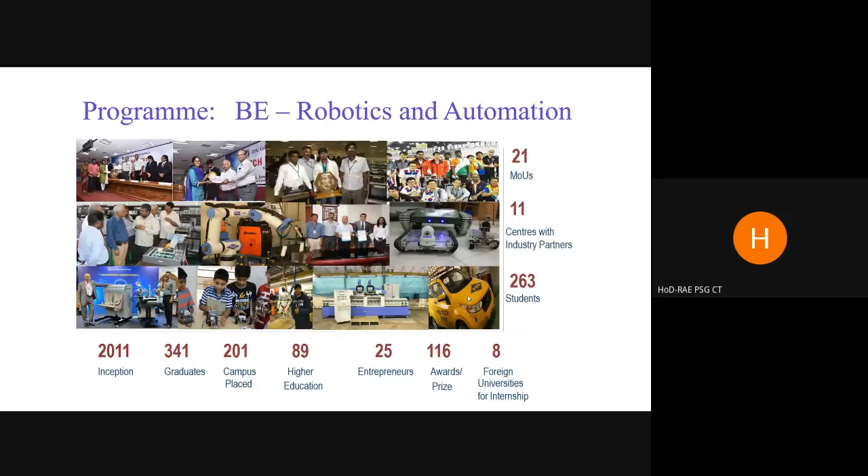There is another autonomous car which we were trying to develop for Mahindra as part of the Mahindra Rise competition. These are some of the snapshots of what we have done so far.

The faculty, unlike other conventional programs, we have a pool of faculty members from different disciplines: electrical background, electronics, computer science, mechatronics, and mechanical engineering. Their expertise is shown under the following headings.

17 faculty members are there put together. 10 are having PhDs, 5 pursuing PhDs, and 25 full-time as well as part-time PhD scholars in the department. Out of the 17, 6 of the faculty members are with industry experience.

The average years of experience of the faculty members is around 14. We have 18 plus 1, 19 sponsored projects to the tune of around 40 crore. We have around 16 project engineers altogether working under various projects. So far, about 248 publications from all these faculty members.

The faculty members actively participate in conferences, workshops, and other training programs. We have good strength in design, manufacturing, and industrial engineering. We have a group working on sensors, machine vision, and image processing, because in any robotic system vision systems play a major role. Then controllers and soft computing, there is another team. Electrical machines, drives, and control systems, there is also a good team.

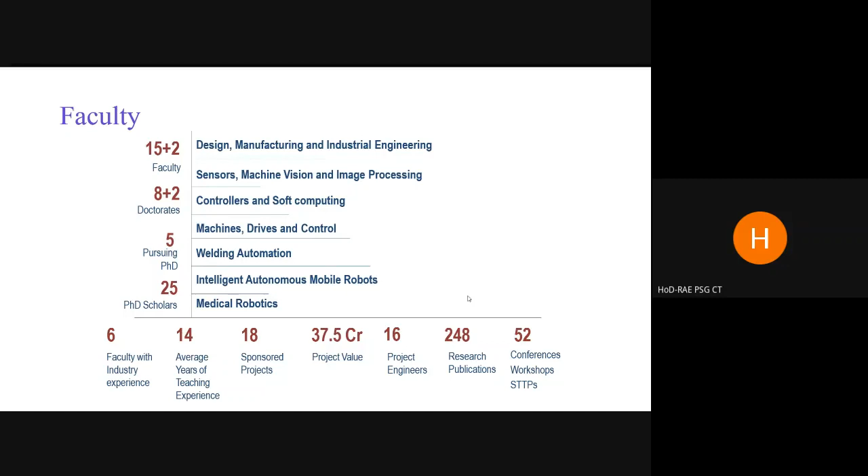Welding is one area. If you take the application side of robotics, we have identified 3 major areas. One is welding automation, welding robots, under the industrial robotics group. Another is mobile robots. Another team is on medical robots. So the application expertise spans industrial robots, mobile robots, and medical robots.

These are my strength, the department's core group, and their expertise are shown here. These things, I think you can have a look at in the website and you can get it.

Just a sample of how the curriculum consists, because most of you may be from other background, other core programs. So this is how the constitution of the curriculum is. Basic sciences forms part of it, as a standard AICTE's grouping.

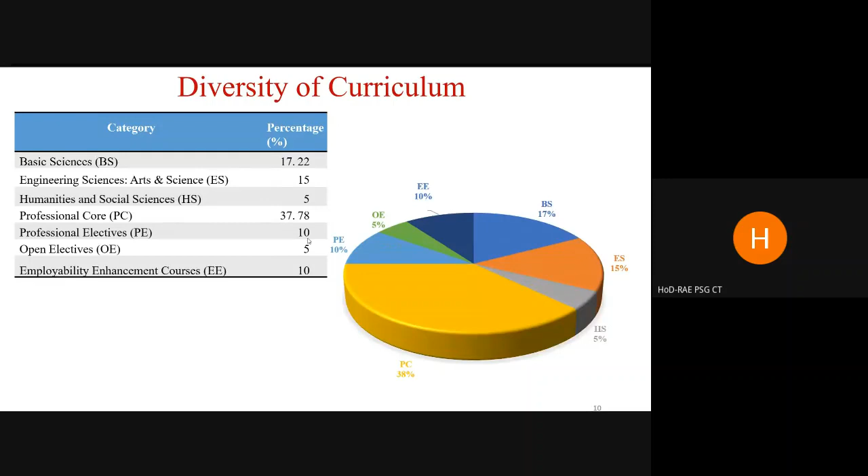Under mechanical stream, we have strength of materials, kinematics and dynamics, hydraulics and pneumatics, manufacturing technology, design of mechanical transmission systems.

In the electrical stream, we have electrical machines and power systems, linear integrated circuits, automatic control systems, microprocessors and microcontrollers, power electronics and drives. In the computer science stream, we have data structures and algorithms, embedded and real-time systems, Internet of Things, machine learning, AI.

Under automation, we have sensors and transducers, CNC machines, PLCs, automation system design, and TIA. Coming to the robotics group, we have robot kinematics and dynamics, field and service robotics, industrial robotics and material handling systems, vision systems, and medical robotics.

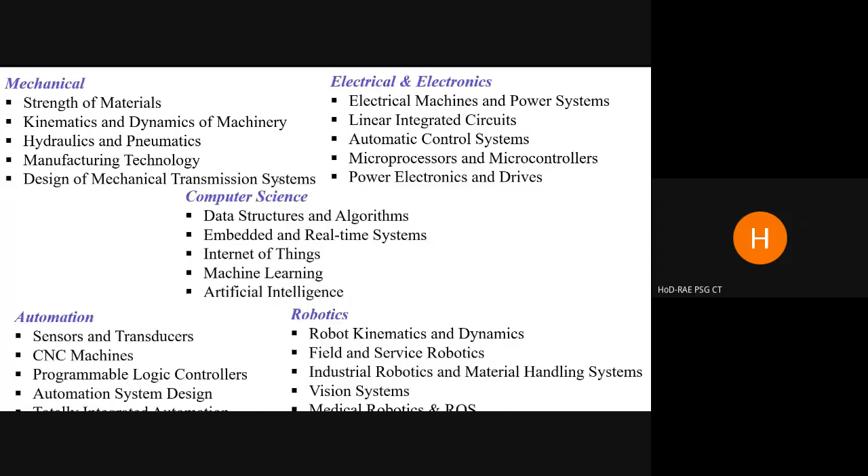So these are the major courses the students of this program go through. At the end, once he or she completes this program, they are able to take up design and development of automation systems, as well as robots for various applications.

Apart from the 3 credit courses, we also have a system called the 1 credit course. These courses are offered not from the department, but by experts of the discipline from various industries. Industrial experts come and deliver courses on these titles, and evaluation also will be done at the end.

One major thing we practice in the department is that for every course, a student going through the program should do projects or mini projects. That should satisfy, and will be a part of the assessment.

To make that possible, we have internships and an innovation lab. In the 7th semester there is project work phase 1, and a major project in the 8th semester. We prefer students to go to industries, take up an industrial problem, and work on it. Internship possibilities in foreign universities can also be explored.

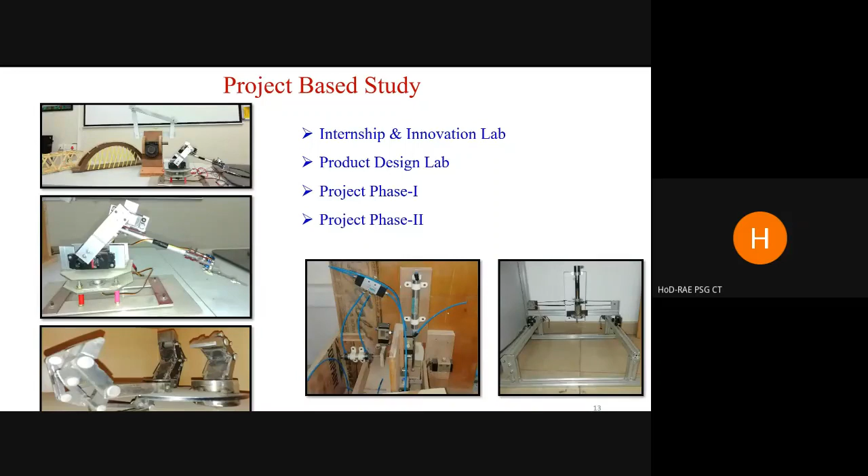To make learning more practical, we have several hardware facilities in the department. These are some of the centers of excellence which we have set up in association with various leading industries in the field of automation and robotics.

The first one is the PSG Siemens Center for Excellence in Automation. This center houses PLCs, DCS, SCADA, and HMI systems. We also have application units with servo motors, stepper motors, induction motors with VFD or variable frequency drives.

Then the PSG Adept Center for Robotics has 2 robots with Omron and Adept. One is a SCARA, another is a parallel kinematic robot.

Then we have a center with Festo, called the PSG Festo Center for Robotronics, where we have simulation stations and hardware stations where automation processes can be simulated. We also have a Robotino industrial as well as mobile robots from Festo.

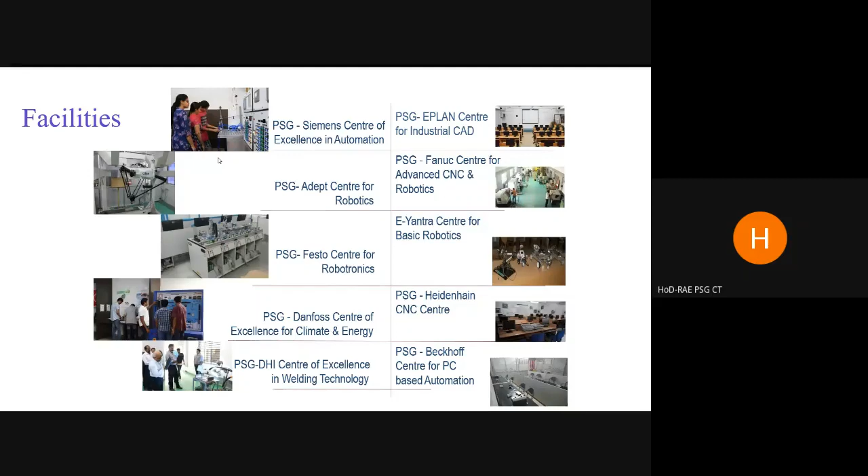These are the snapshots of the facilities available in the Center for Excellence in Welding Engineering and Technology.

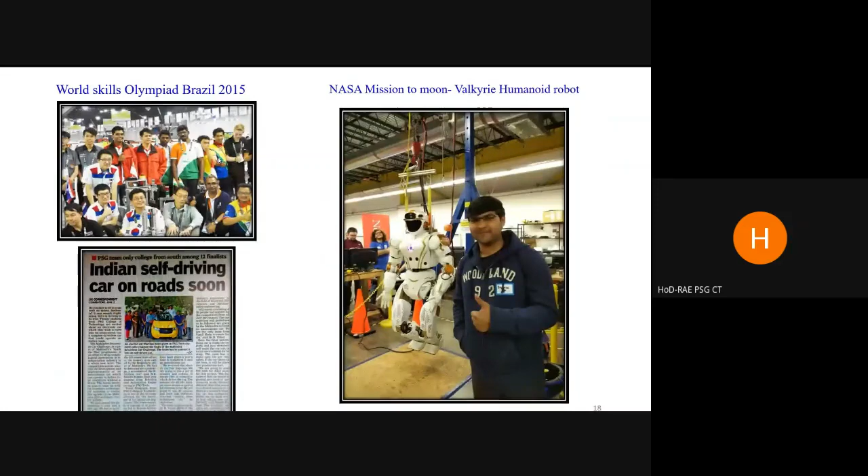These are some of the achievements of the students, which I showed you in the first slide also.

Now we will start with industrial robots. In this presentation I will touch upon the introduction to robotics, then some history about how all this started, the various configurations of industrial robots available in the market, how to identify them, what are the applications of each, how to select robots for such applications, various applications, and what is new technology in robotics. This is what I intend to present, plus at the end, an introduction to the Center of Excellence in Welding Engineering and Technology.

So when we hear the word robot, the first picture that comes to mind will be something like this, a manipulator. It's a very popular industrial configuration, a system which develops but cannot have the ability to think and understand decisions.

Sorry, is it a question? I mean to say it does not have feeling, sensation, senses. I didn't get you, sorry, can you repeat the question? Sir, I want to know, do robots have sensation and feelings? Yeah, I'll come to that, wait. Okay sir.

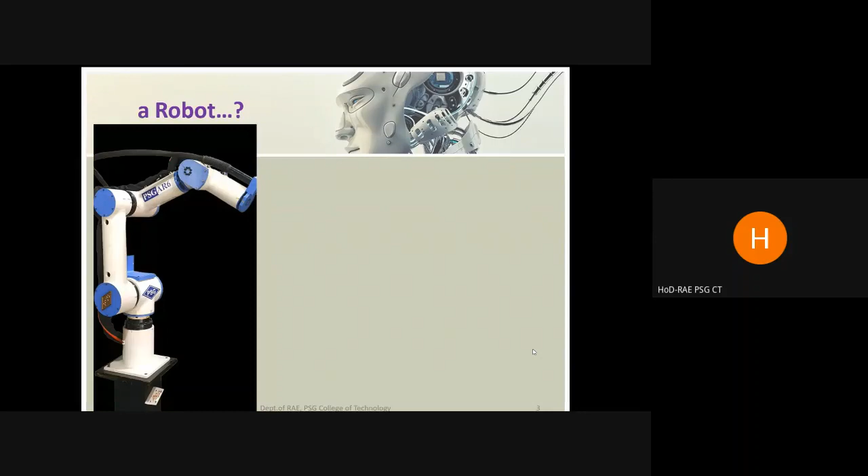The Indian one, maybe Enthiran, was a big hit with superstar Rajinikanth himself as a robot. Robocop, Interstellar, these were all, most of these movies were super hits. And also there was a movie, Modern Times, from 1936, a very comedy movie. So various directors, various concepts they presented, science fiction, action movies, comedy movies.

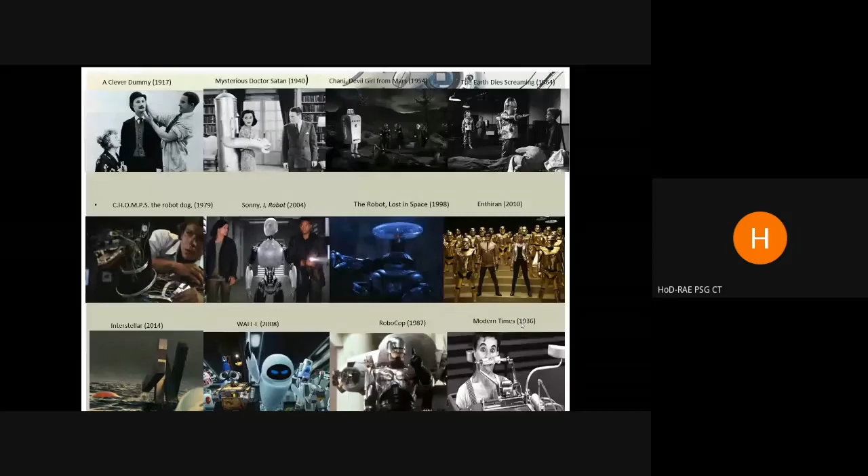The word robot is actually quite old, it's not that robots are very new. Karel Capek, who lived up to 1938, in the 1920s published books as well as dramas. In his dramas, he introduced the character, the robot.

Most of the inventions of humans, somebody would have dreamed about it first. Once upon a time it was a fantasy, then it became a reality later. So unless you dream about something... early James Bond movies would have looked like fiction in those days, but now it's a reality. Man has this unique capability of fancying or fantasizing, and then we work towards that and make it a reality.

Most of these things originated from nature. We observe nature very closely and try to replicate or reproduce things that are available in nature. In those movies, the robots were more intelligent, with a lot of sensors, and they have emotions. This became a field of study later, and that was called robotics.

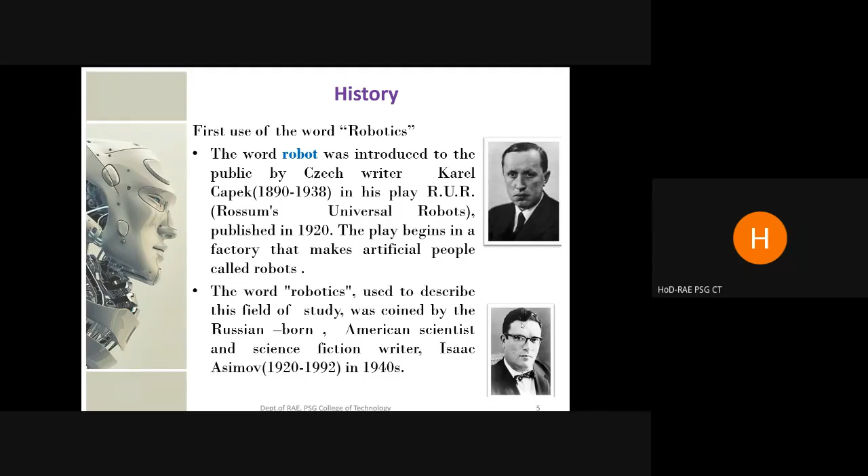There is another science fiction novelist, Isaac Asimov, who popularized the word. From Karel Capek to Isaac Asimov, it was limited to dramas or plays he used to write about. But it was taken to the masses by Isaac Asimov. He started writing a lot of science fiction novels, which became a big hit in those days. Even today, Isaac Asimov's novels are very interesting. He is the one who coined the fundamental laws of robots.

If you've seen the movie I, Robot, Will Smith tells you the 3 laws of robots. Fundamentally, these laws say that a robot should not harm a human being, even for its own existence, or to protect somebody else. Basically, robots are like slaves - they should take commands from people and protect humans, and fundamentally they should not harm humans.

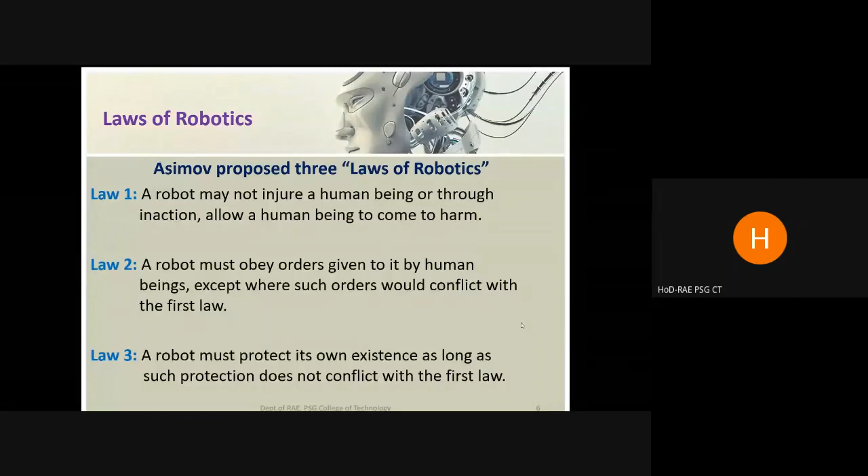But there are movies like Robocop, or even recent drones which can attack humans. So yes, these laws are sometimes broken. Fundamentally, when Isaac Asimov started writing these laws for his books, his major concern was to never allow a robot to harm humans. But as the speed at which AI is moving, AI is expanding and becoming more and more powerful, maybe a stage will come, like in I, Robot, where robots will even control humans.

It is possible. Though this is against the fundamental laws of robots, probably Asimov, though he was a science fiction novelist who dreamed a lot about robots, may not have thought robots would become such an intelligent device that they could control or keep humans under control. Now robots are there to track, to trace, to monitor, and even to attack humans. That is the growth robotics has seen, especially with the speed of AI in science and technology.

Coming to industrial robotics, Unimate was the first industrial robot, in 1961. These robots were used to handle equipment or parts like picture tubes of TVs for assembly. George Devol in the 1950s had several patents on the first industrial robot. So from a concept in a play, to a novel series, to a reality, it only took 20-25 years, and we had a robot at the end.

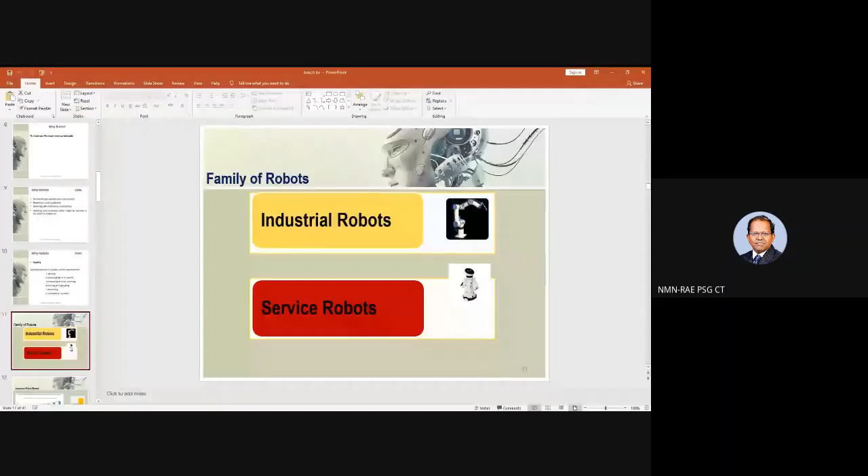Sorry for the interruption, sir. Prabhakaran here. Sir, can you share your screen once again? Oh sorry, it's not coming. Yes sir, someone presented, so that's why. You just share your screen once again, sir. Yeah, I'll do it, click. Thank you, sir. Now it's fine, sir, okay. Thank you, sir.

So we have grouped into two groups: one is industrial robots and another is service robots. Whatever is not a part of industrial robots has become part of service robots. In the service robots category, we have UAVs, drones, underwater and mobile robots for various kinds of terrains. Then there are application-based robots, like robots to take care of elderly people, robots for surgery, robots for helping people, and robots like exoskeletons. So there is a big group of service robots.

Initially we thought this market would be very small, but if you look at the market developing right now, it has reached a stage where service robots have also become as big as the industrial robot sector.

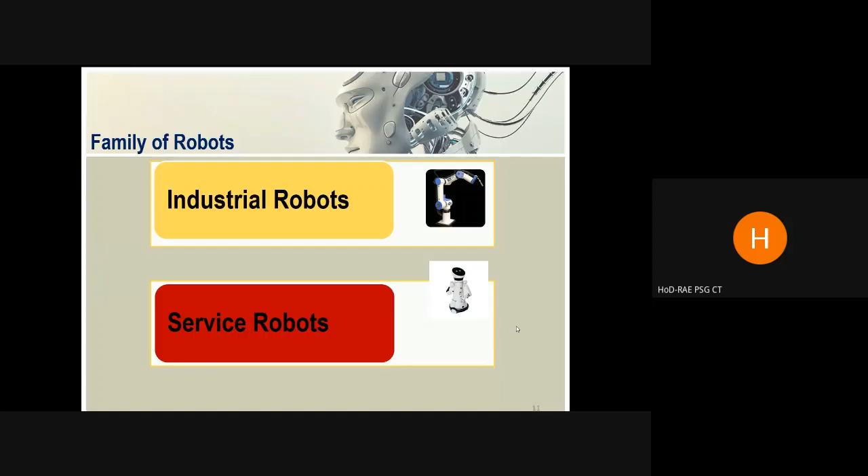So this is the industrial robot market. We have also considered the impact of COVID, because all industries saw a sharp decline due to COVID in 2020. But the robotics sector is expected to grow despite the epidemic, because one major thing industries require is social distancing, and if we can eliminate the manual process, the process becomes as safe as possible, or the safest, by using automated systems or robots.

It is predicted that by 2024, the market for industrial robots will be 75.6 billion US dollars. In 2019, it was expected to be about 48.7 billion, so you can see the growth. It is an ever increasing market, except for 2020, and maybe the effect will slightly continue into 2021, but the market still continues to increase worldwide, especially in India. There is a big boom for robots in industries.

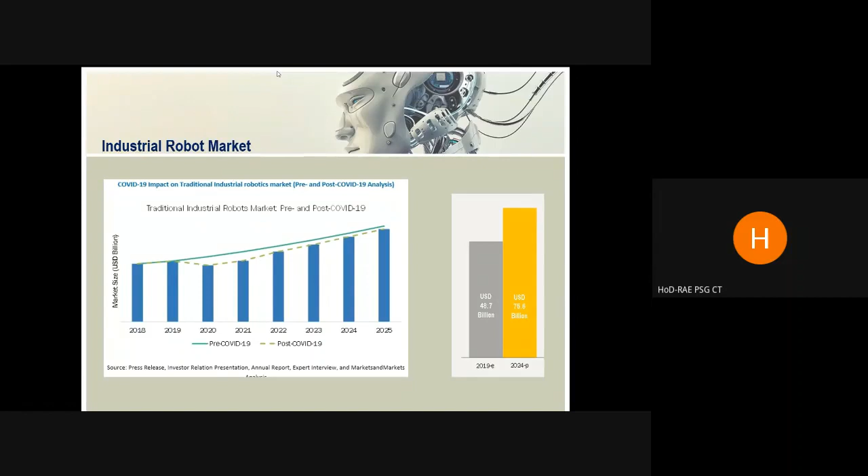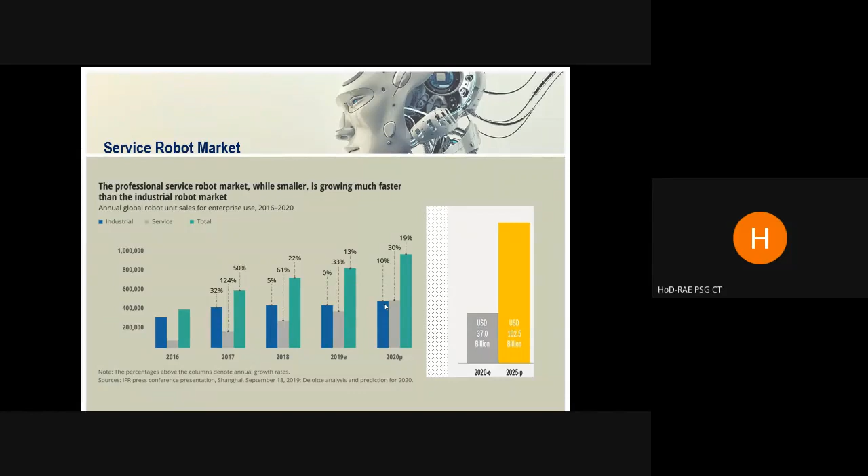I'll skip some of this and move on to some general terms. When you are entering the robotics field - whether you want to select a robot, design a robot, or specify a robot for an application - there are some general terms that are popular in this robotics industry.

First is the payload. You can specify this, or if you download the specification or data sheet of a robot, you can see all these terms defined there.

Payload is the ability to carry continuously and satisfactorily a given maximum weight at a given speed. Suppose the specification sheet of a robot specifies it as 10 kilogram. That means the robot end-effector, including the end-effector—if you are using a gripper to grab the component, including the gripper weight—it is 10 kg. It is not the weight of the job we are going to lift; payload includes the weight of the gripper or the end effector.

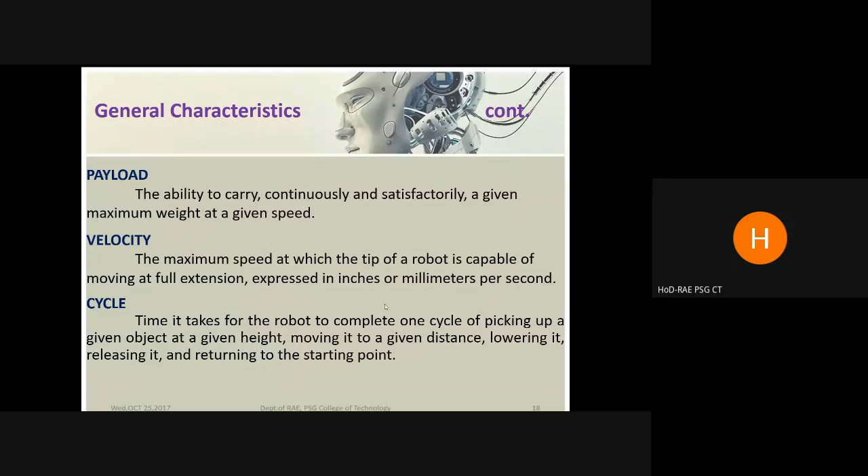Cycle is the time it takes for the robot to complete one cycle of picking up a given object at a given height, moving it a given distance, lowering it, releasing it, and returning to the starting point. So the programmed sequence of operations from the starting point, completing the entire process, and coming back to the starting point again—that we call one cycle of operation of a robot.

Another important term is accuracy: a robot's ability to position the end effector at a specified point in space upon receiving a control command, without previously having attained that position. This is almost very similar to what we describe in CNC machines—its ability to position the tool or the end effector defines the accuracy of the robot.

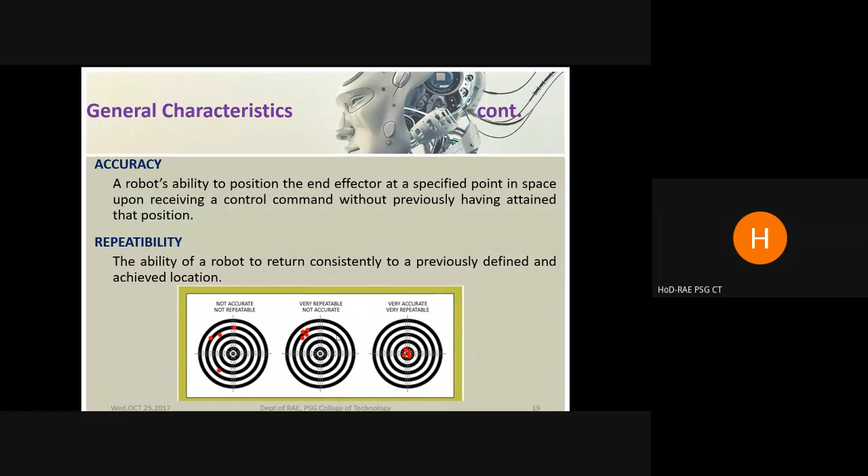Another popular term is resolution: the smallest incremental change in position that it can make, or that its control system can measure. Again, very similar to a CNC machine, where the smallest increment the machine axis can move, or the control system can detect when it moves—say 0.1 micron, 1 micron, 10 microns, or 100 microns. The smallest increment of change it is able to detect, measure, or move is called resolution.

The physical size of a robot influences its capacity and capabilities, and the size varies according to the kind of configuration we adopt for the industrial robot.

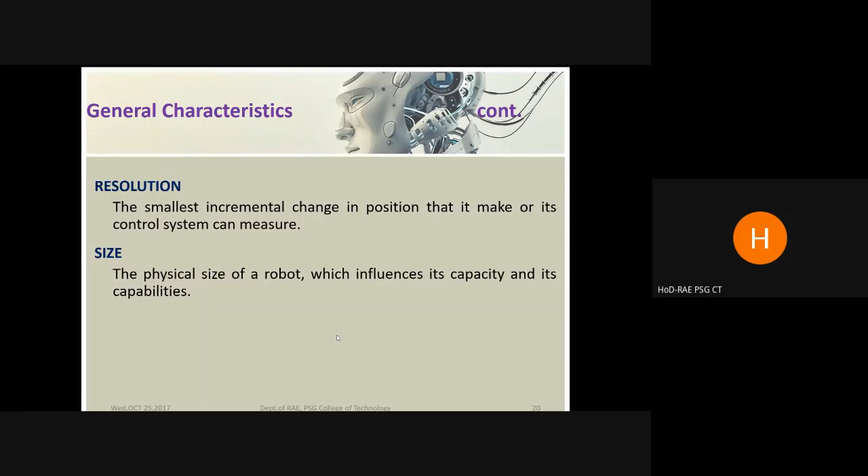Basically, any robotic system consists of these elements. You can just relate it to our own human system. We have a controller, our brain.

If you want to lift your right hand, or when you are using your finger to initiate an ATM money withdrawing process, your controller tells your right arm that you have to take the ATM card and insert it in the machine. Then the machine asks you some questions, and you have to point your finger on the respective buttons. How does this process get actuated, how does this happen inside your body?

Similarly, these are the basic components of robots. There is a manipulator, which is very similar to our human hand, and fundamentally it consists of links and joints. It is like a human hand — we also have joints, we also have links. So the robotic system is not much different; it is almost a replication of a human hand.

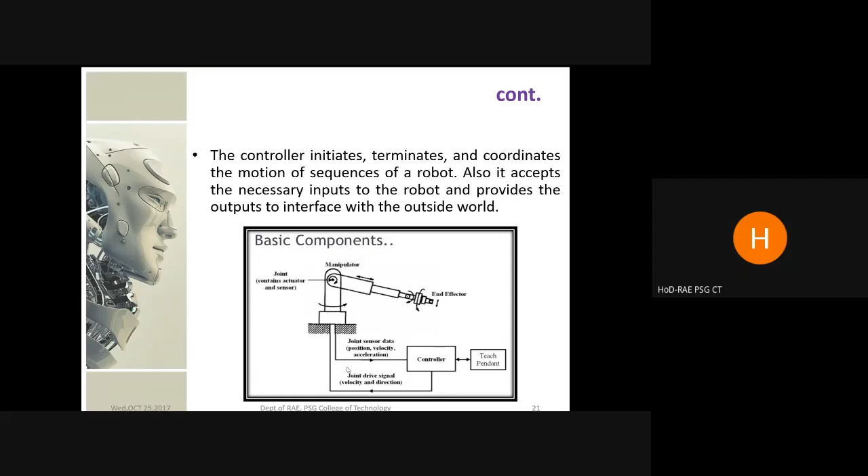The manipulator is the most important part. It's purely a mechanical unit that provides motion similar to that of a human arm. Various manufacturers design different kinds of manipulators, considering how fast it should move and stability issues. As you increase the reach of the arm, you have to increase the link length, which may cause stability issues. So according to the application, you need an optimized design to achieve the required speed with the weight on the end effector, while providing stable motion. Its primary function is to provide specific motions that enable the tooling at the end of the arm to do the required task.

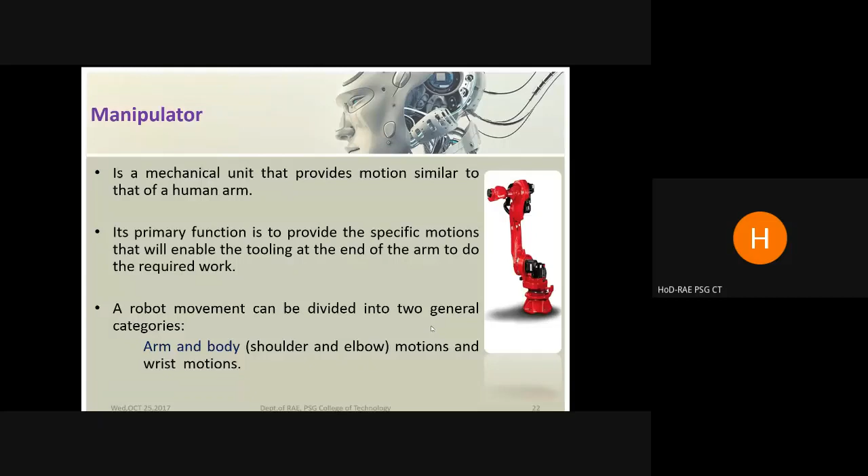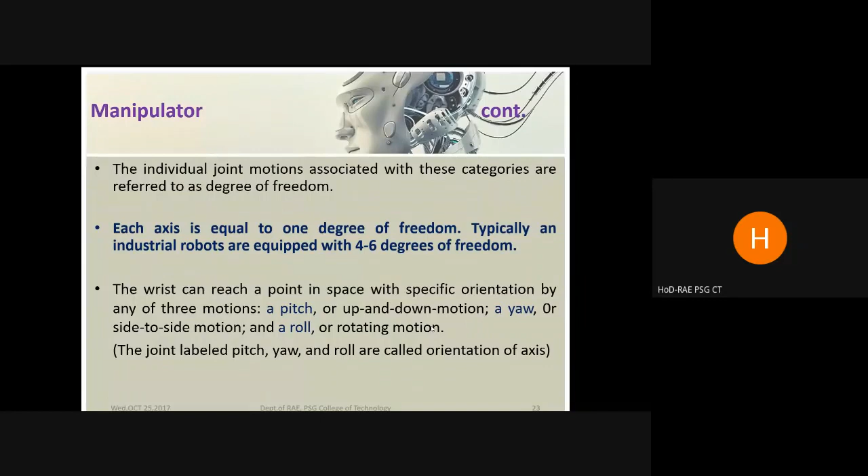End effector is another key component. Normally, if you buy or plan to buy a robot, industrial robots come in 6 industrial configurations, and you may choose the one required for your application. How this is done depends on several factors we will discuss. But for the given task — why we are purchasing the robot — we need an end effector that takes up the responsibility of achieving the task.

In the initial days, grippers were the most popular end effectors because material handling was identified as one of the major responsibilities of robots, which is why robots were employed in industries. Later, other applications came up. Instead of just a gripper, there are various kinds of gripping systems: pneumatic grippers, mechanical grippers, electromechanical grippers, 2-finger grippers, 3-finger grippers, grippers with changeable and indexable parts, and grippers with tactile sensors and finger-like designs. So several types of grippers were there.

There are also magnetic grippers. Then came other applications like welding torches, paint guns, power tools, drills, nut drivers, and torque spanners — you name it. Now we even use robots for construction. So accordingly, the tool or end effector can be fixed.

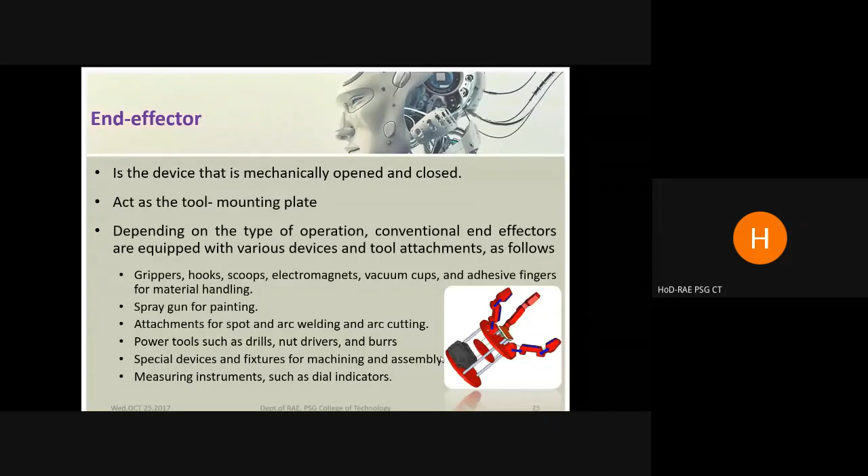Powering up these robots can be through 3 standard power supplies. Normally what we see in the industry are basically electrically driven, electric power sources, and we use servo motors for the axis.

Why do we use servo motors, or why are servo motors the most preferred actuators for robots as well as CNC machines? Because they have several unique features which are not there in conventional motors. One is that these servo motors have a high positioning accuracy.

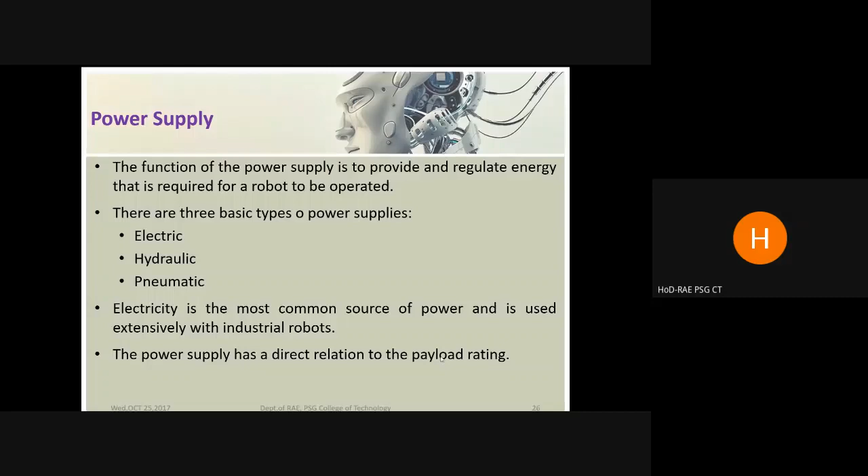There may be one or two machines. Normally we don't use one robot for one machine because there is plenty of idle time where this robot can also be used for loading another machine. So typical industrial configurations consist of robots tending more than one machine. A robot has to work along with other machines, conveyors, inspection tables, material handling systems. The robot controller takes input from various sensors from the field for its own working, as well as to coordinate with other equipment on the shop floor.

The controller of the robot runs its own program. Typically, the programming language of robots—some manufacturers have their own standards, some are graphical, you can just pick, drag, and drop. Basically, a controller receives commands from the user, then it will be converted into a language that the power devices should be able to understand.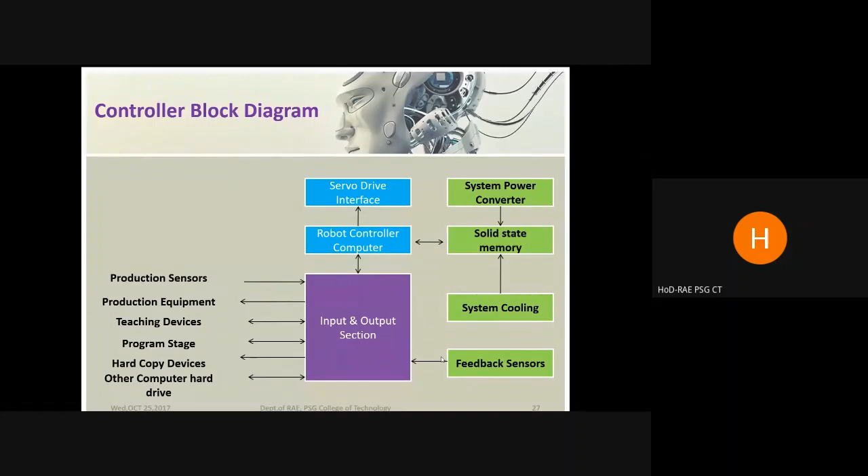So fundamentally, most robotic systems will have these elements. I'll skip this part about mobile robots, and come to industrial robots, since that is our topic.

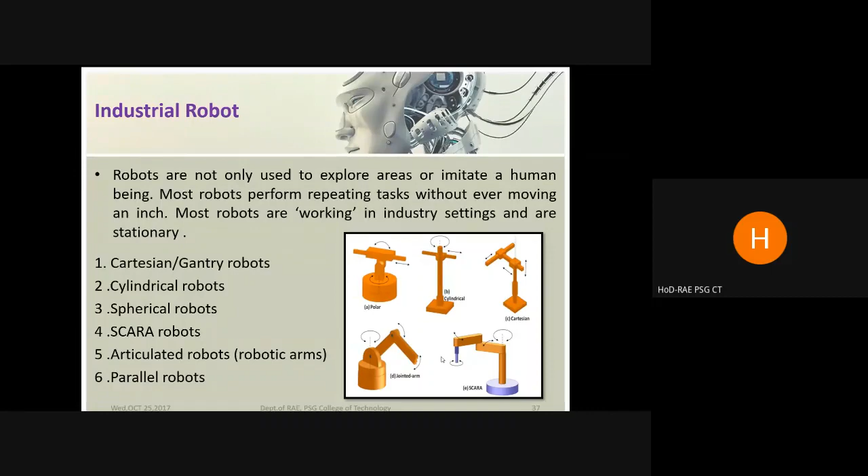Just give me a minute. So the anatomy consists of links and joints. We'll see what this means.

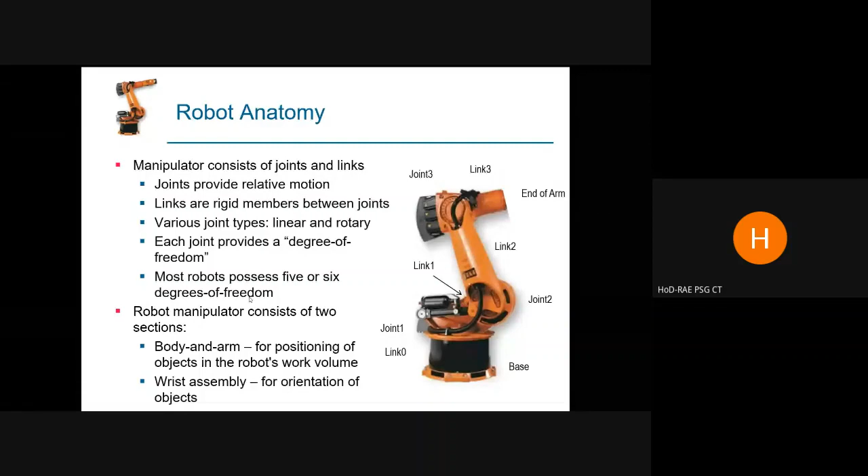Fundamentally there are two types of motion, and the motion can be translational. This happens in two cases: when the joint is linear or orthogonal. Consider links, one as input link and another as output link. There is joint motion possible, like a telescopic antenna, where one link moves inside the joint. That is called a linear joint, represented as L. Then there is an orthogonal joint, where the output link is orthogonal to the input link, like a T junction in pipe fittings. That is represented by O.

Then there is rotary motion, the rotational joint, type R. Then we have the twisting joint, T. And there is another one, the revolving joint, V.

All these three things you can experience with your hands. You can rotate your joints, maybe your wrist. You can twist. You can also revolve, like your shoulder. So these are the 5 joint motions available in any manipulator used in industrial robots. Whatever configuration we discuss, all of them are based on these 5 joint types.

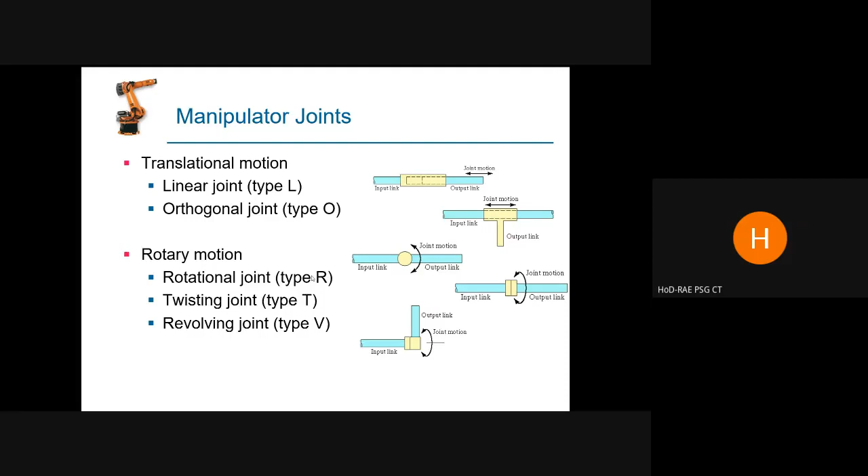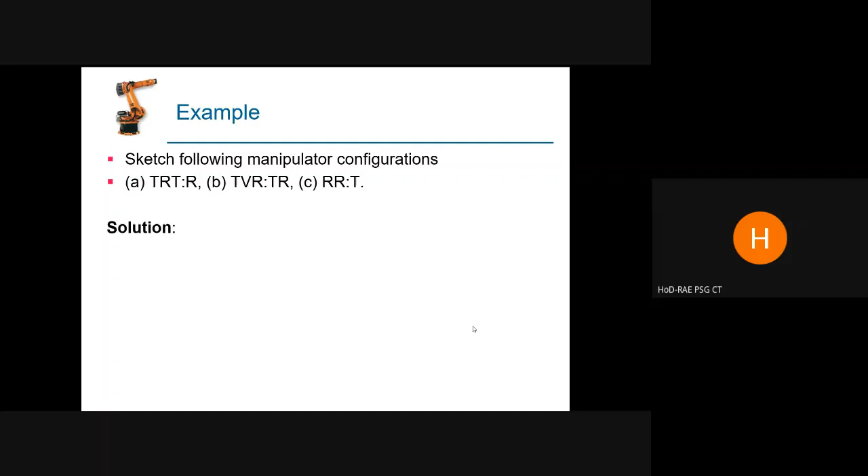Normally, end effectors are connected to twisting joints. So this is RRT, a typical articulated robot configuration. If you just understand this, we'll be able to find out what configurations are.

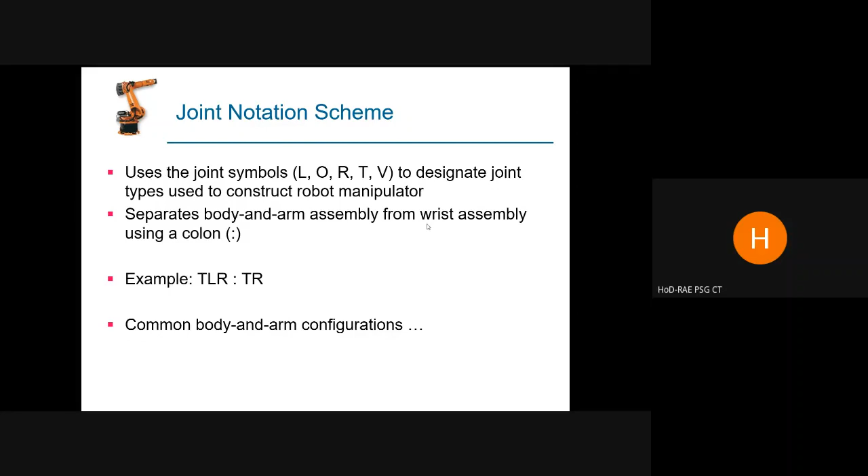Any joint notation will consist of symbols L, O, R, T, V to designate joint types used to construct the robot manipulator. A colon separates the body and arm assembly from the wrist assembly, because the wrist assembly is where the tool or end effector is fixed. Is it clear? This is fundamental to how you represent the architecture of any robot.

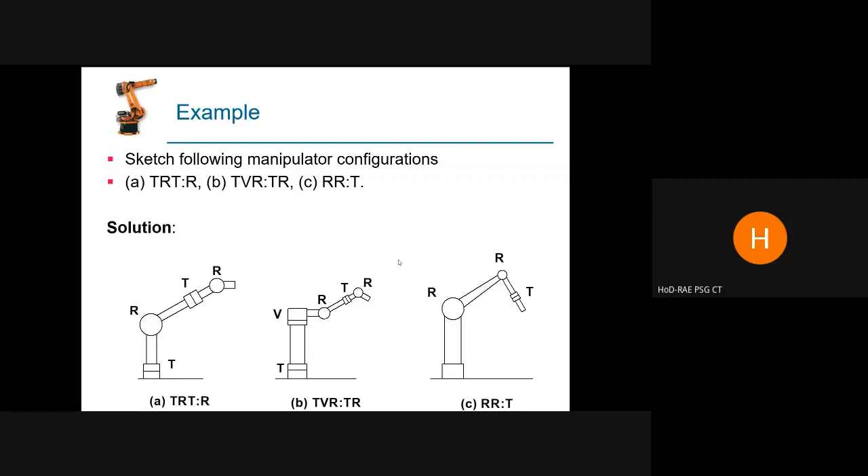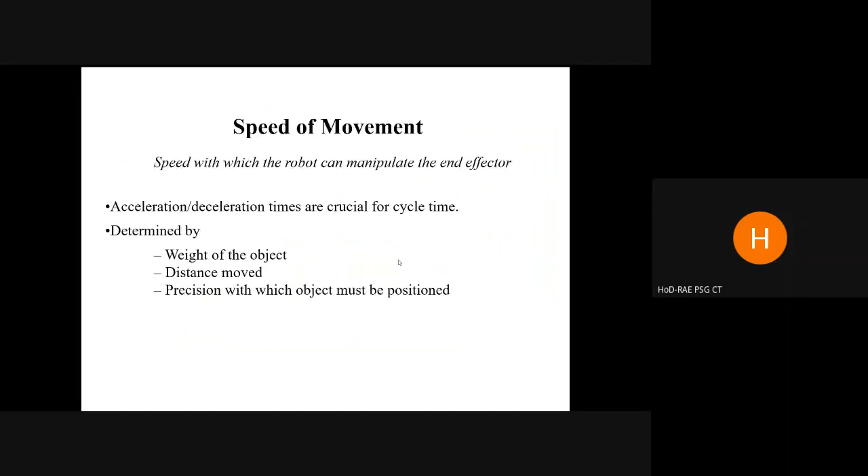So the SCARA notation is VRO: revolving, rotational, and orthogonal. The expansion of SCARA is Selectively Compliant Assembly Robot Arm.

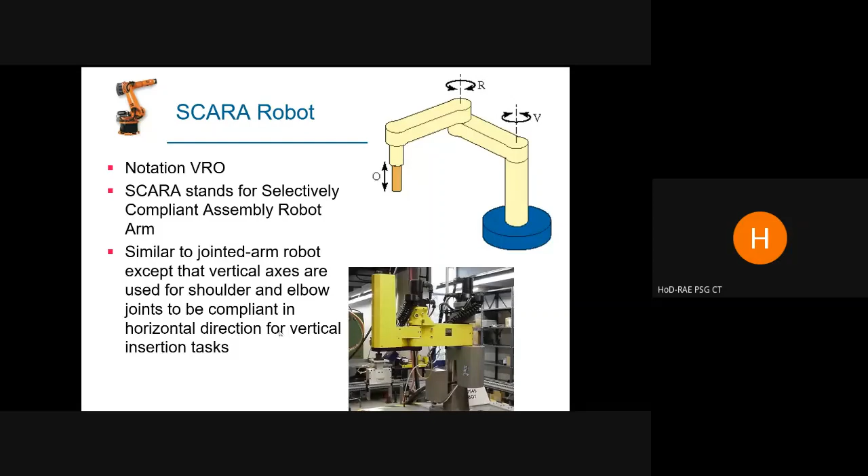Where do we use it? This is one practical case application of a SCARA. SCARA robots are more popular in applications where high repeatability is required. Typically, the number of axes is less, 3 to 4 axes normally, and since there are fewer axes, it takes lesser time for motion. So wherever you want speed, like pick from a conveyor, place it somewhere, pick from another inspection station, transfer it to another thing, or put and pick up in bins, sorting - such applications. SCARA robots are very popular and they are very fast.

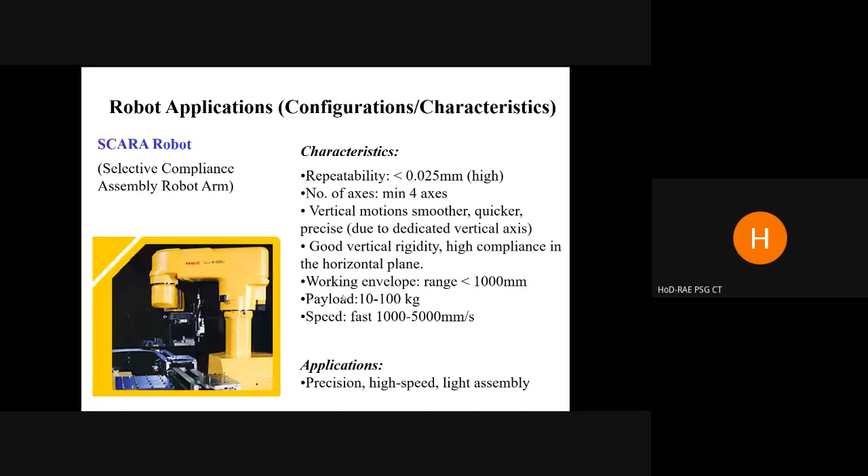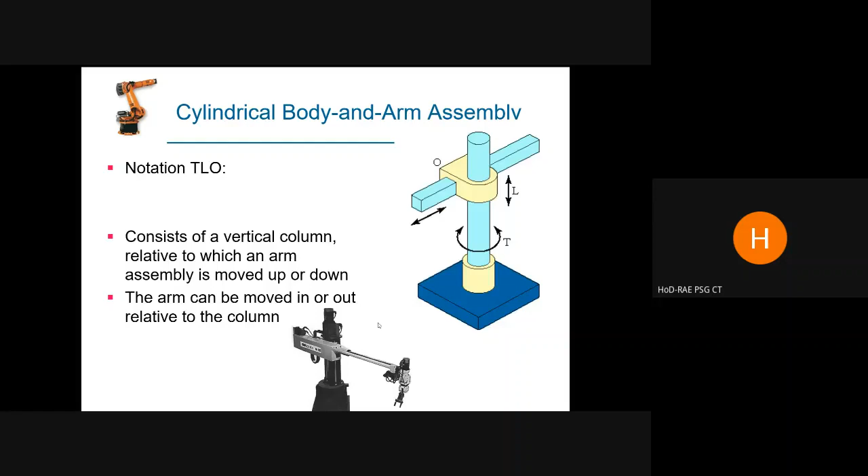Cylindrical robot arm notation is TLO: a twist, then a linear, and an orthogonal movement. These robots consist of a vertical column relative to which an arm assembly is moved up and down. This varies according to the size and length of the arm; the size and range vary. These are very simple robots, maybe the cheapest of the versions in robots. These are not meant for picking up big objects and keeping it, but small robots are used for precise material handling applications.

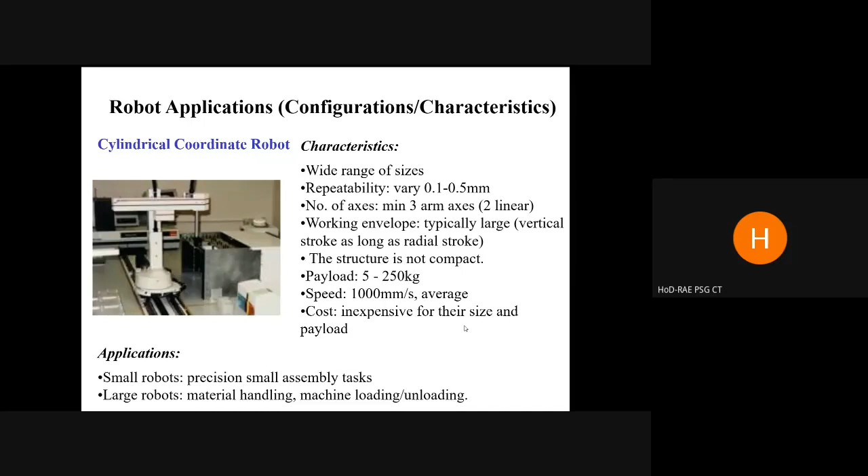Then next is the jointed arm or the articulated, which consists of TRR. Basically, this is the base which moves on another fixed one, so that axis or joint is the twist. Then the rotational axis can be 3, 4, or 5, depending. And the last one also is sometimes a twisting joint. So these are jointed arm robots.

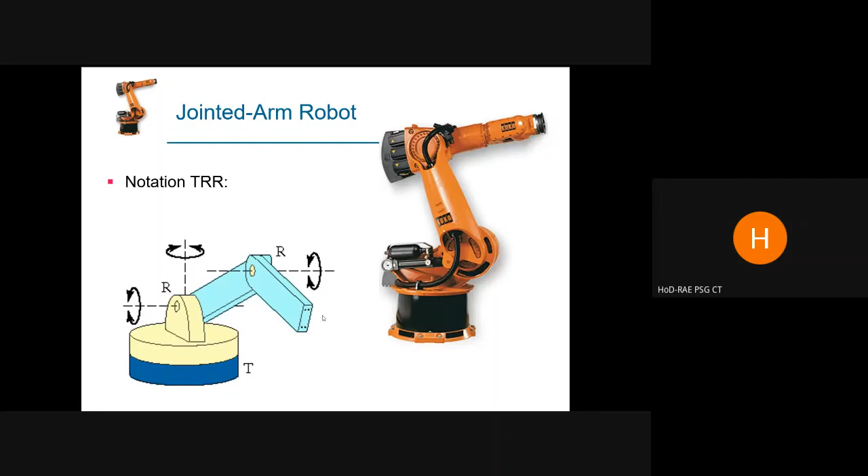These are employed in various applications in industry, up to a payload of 130 kg or 150 kg are available. They are fast, but not as fast as the SCARA or parallel kinematic. Typically they find applications in welding, painting, sealing, deburring, and also for pick and place or machine tending applications.

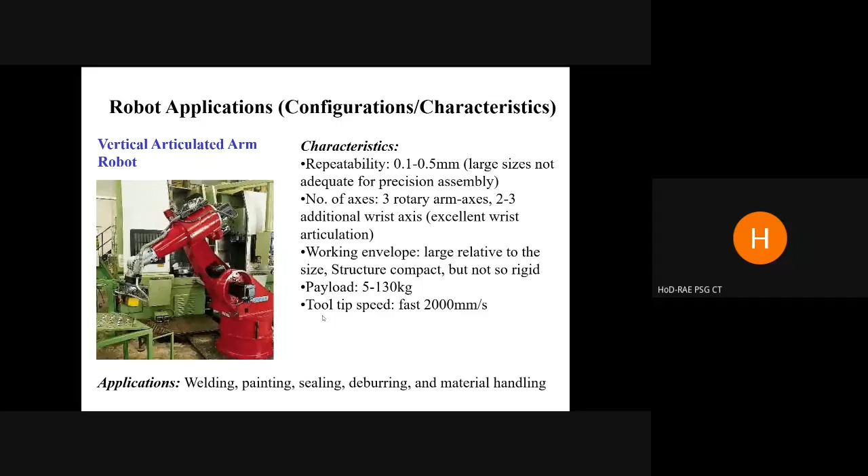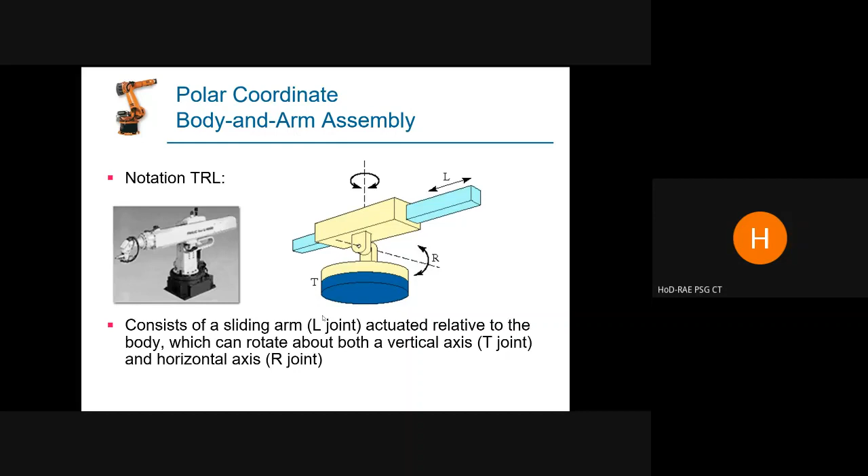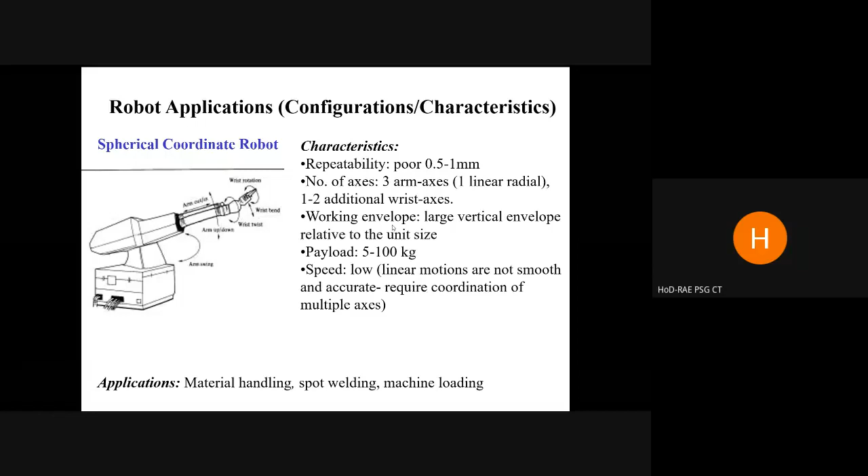Polar coordinate robots are not that popular these days because of the features available in other robots, but there's still a configuration called Polar robot. If you see the Unimate robot, it was almost the same configuration. Repeatability is not that good, normally 3 or 4 axes. But the advantage is it has a large vertical envelope, so if you want to pick something from the ground and lift or reach a height, this configuration is best suited. It is not meant for high-speed applications. Sometimes we use it for spot welding or loading ASRS stations.

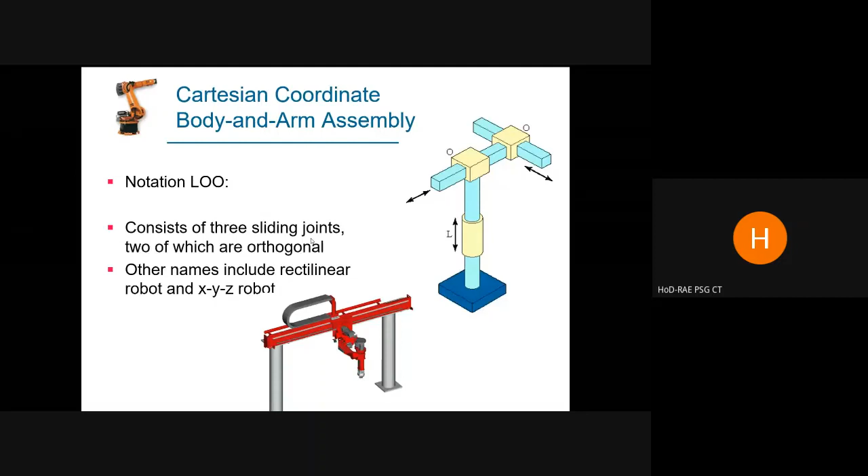Cartesian robot configuration is one linear and two orthogonal, consisting of 3 sliding joints, 2 of which are orthogonal. It's very similar to the XYZ arrangement of a vertical CNC machine. These robots find a lot of applications, especially in inspection, assembly, and gluing.

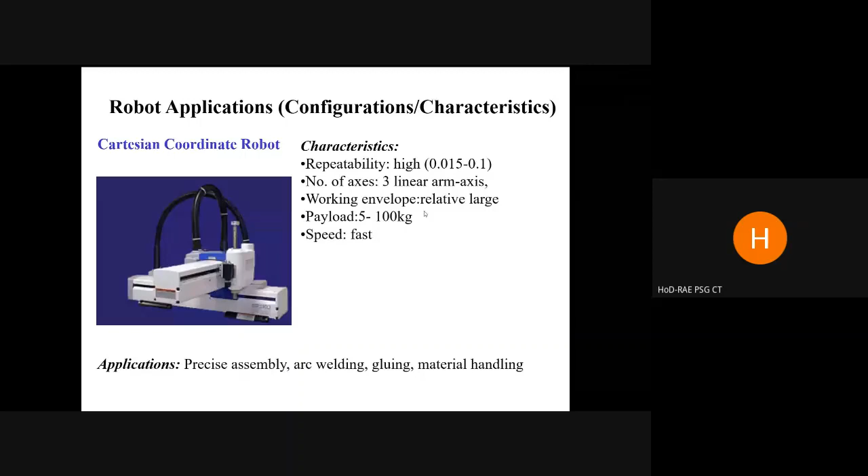Typically they give better repeatability. Since there are only 3 axes, it moves on - the work volume is also limited, but it can be based on the length of X, Y, and Z, so the envelope can cover a large space. Typically not meant for carrying huge heavy weight, but it carries up to 100 kg. And since it's like a 3-axis machine, it is fast enough to move materials.

Some industrial applications you can see are like a conveyor or an overhead crane - it can also be used.

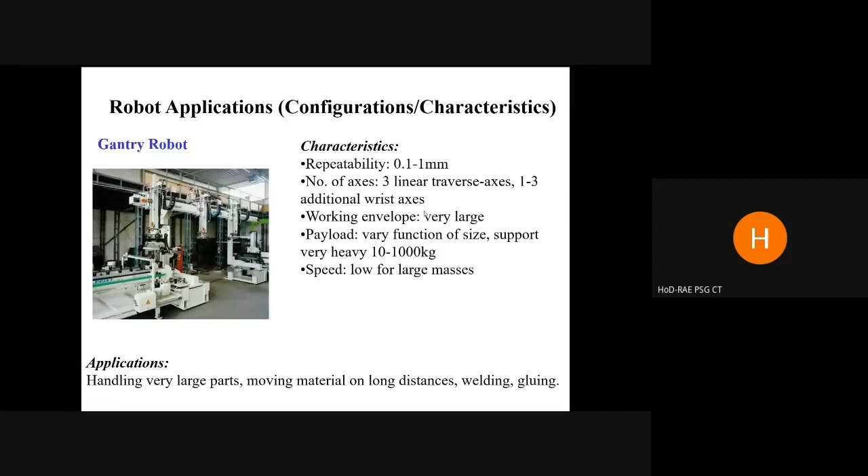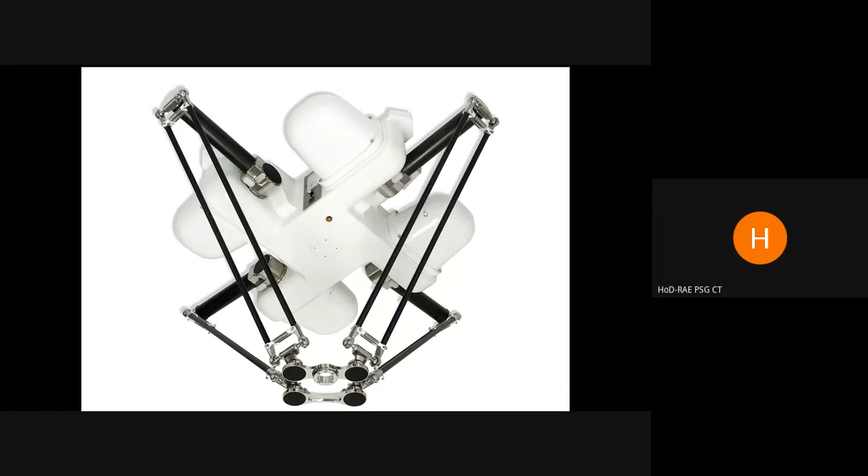So pick and place applications find a lot of uses, especially in electronic PCB assembly, food packing, like connectors. If you have a 40-pin connector, the 40 pins have to be fixed at the right place or right slots, and that can be done very fast using these robots. So these are the 6 industrial configurations of robots.

So I think we have come to a time where I should let you ask some questions.

That is about the history, where the industrial robot stands now, how big is the industrial robot market, how big is the service robotics market, and what are the most popular 6 configurations used to represent an industrial robot.

So now I think you'll be able to understand, if you look at an industrial robot, what kind of configuration it belongs to, how many degrees of freedom it has. You can understand common terms like work volume, payload, accuracy, resolution, and appreciate all these things. And let us also understand the applications.

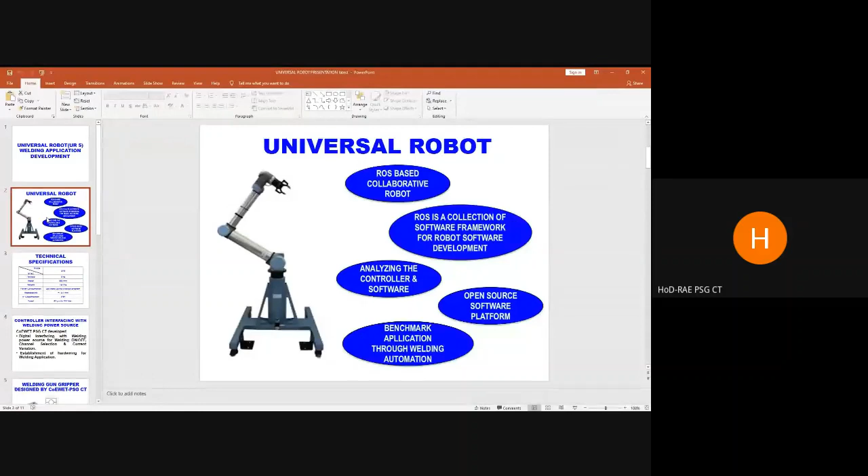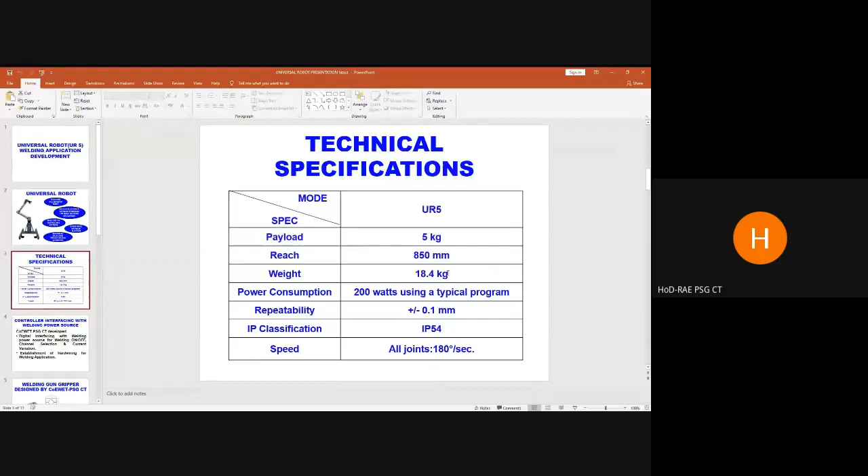Some of the typical specifications of UR5: it's a small robot with a payload of 5 kilograms, a reach of 850 mm, with a total weight of 18.4 kilograms, so you can even lift it and take it to a classroom. It works on a single phase supply with very good repeatability.

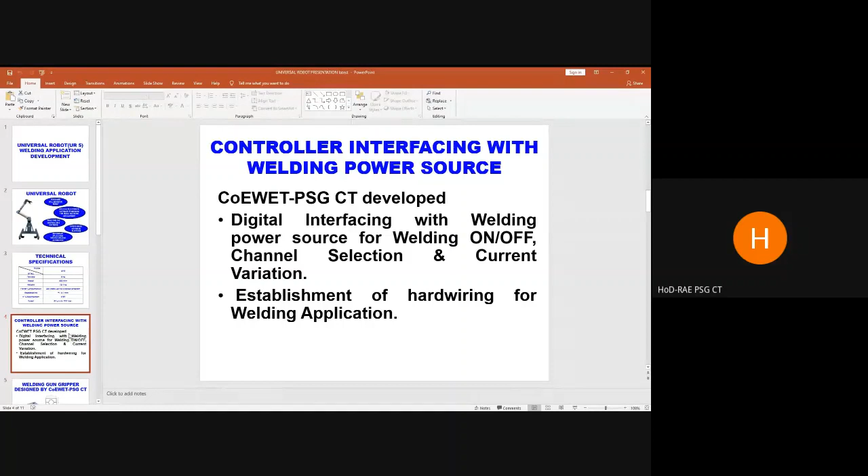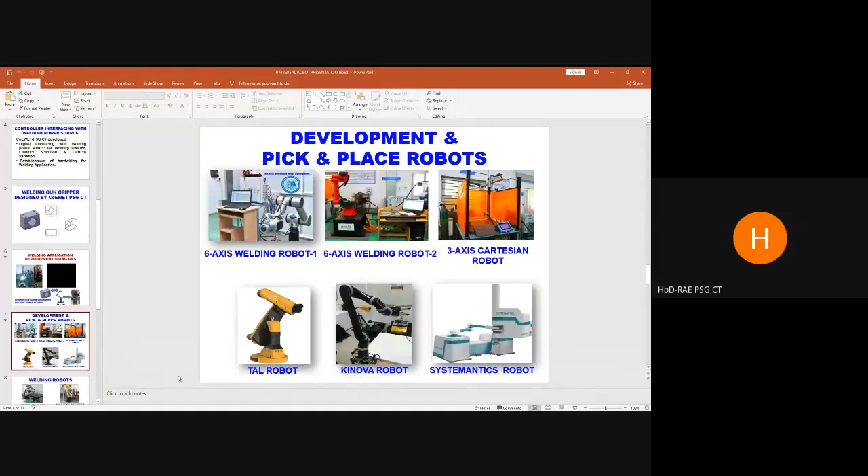We also have a Kinova. Again, this is ROS-based. The UR5 and this Kinova are called cobots, not industrial robots.

Cobots means collaborative robots. Collaborative robots are the new term, or new kind of robots in the industry, because they can work along with human beings. Earlier, industrial robots were typically inside a cage in the industry, because humans are not supposed to enter the cage during robot functions, as humans can get hurt. But cobots are made with sensors so that if it hits somebody, or is going to hit somebody, it will stop. It ensures humans working closer to robots are not harmed. So that is another new term in industrial robots: cobot.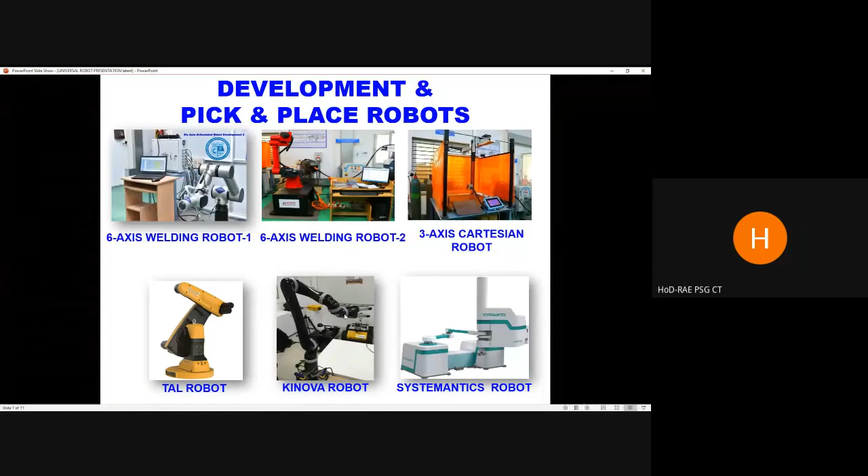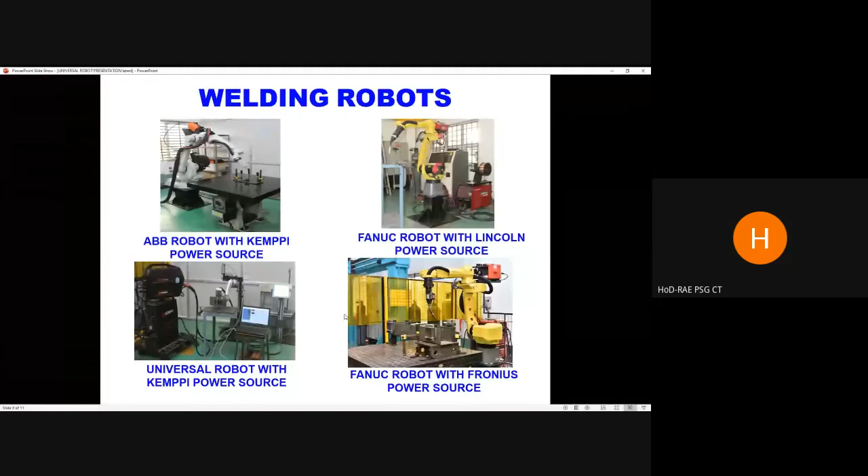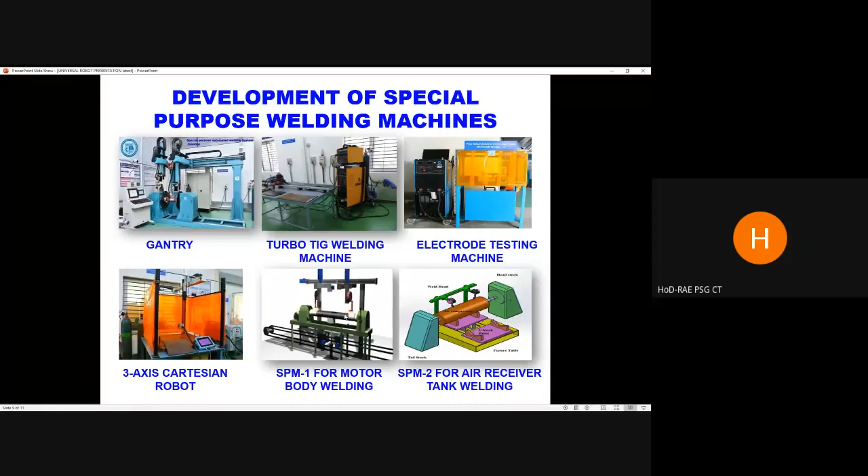Unfortunately, the course has become online. If it had been happening inside the campus, we all would have got the opportunity to program, play, and move these robots. You could have done some experiments here, but all these facilities are available with funding from the Ministry of Heavy Industries as well as from PSG management. Altogether, the investment is around 30 crore.

That is various types of power sources. We have welding power sources available here. So I think we have 2-3 minutes for some questions, if you have any.